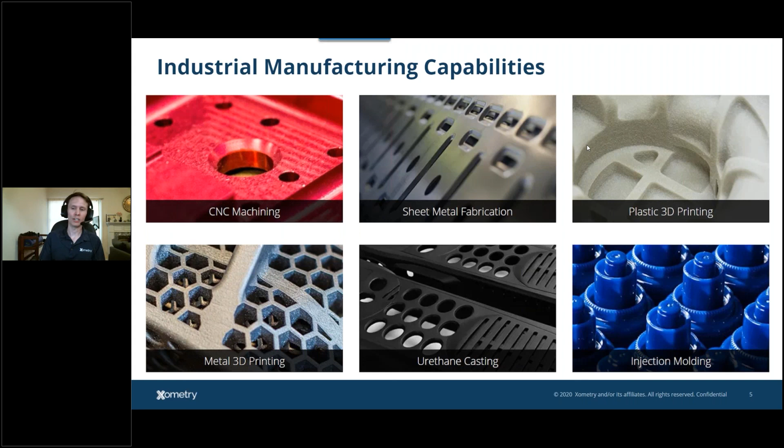And then of course injection molding. So this is something that can truly scale, whether you're looking for the low hundreds or the tens of thousands or the hundreds of thousands. Injection molding is one of the best ways to make parts in high production at low cost per part. So that's what we're going to be talking about today.

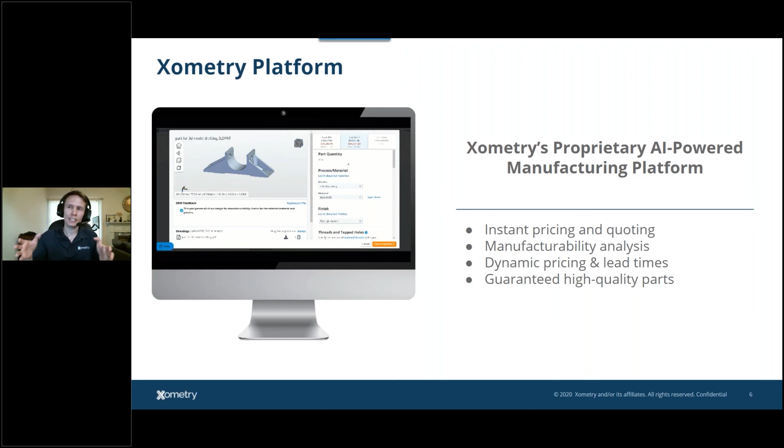Xometry's platform is really unique because it does allow you to upload technical data and kind of spin the CAD and start configuring your part directly online. It's one of the most simplified ways to communicate your technical needs. And for some processes, it's a quote and done, quote and buy experience. And for other things like molding, it may be the beginning of the conversation, but you're creating that template to help guide us in where you want to be with your parts.

I'm going to just go drive the site real quick here, show you a little bit about Xometry's website and our platform, because I know also you may be in different stages of your product development process, or you may be working with a technology that's new to you, like molding. Not all of us have done injection molding projects, so sometimes it may be worth looking at our design guides or resources. So this is Xometry.com's website here. You can see that we have a variety of manufacturing processes that you could go and either start a quote immediately or learn more about.

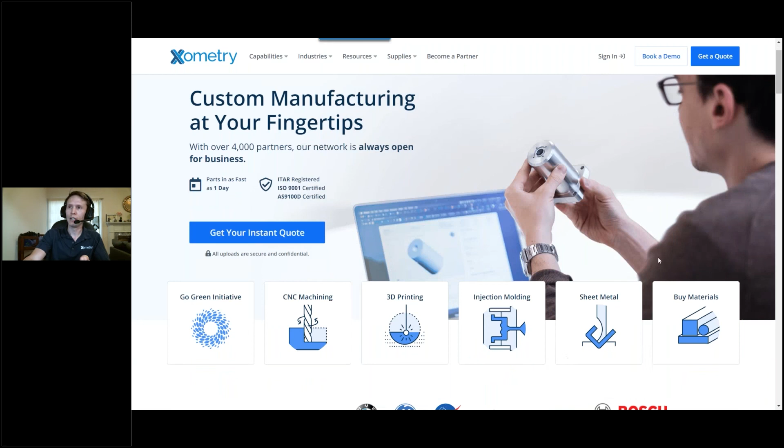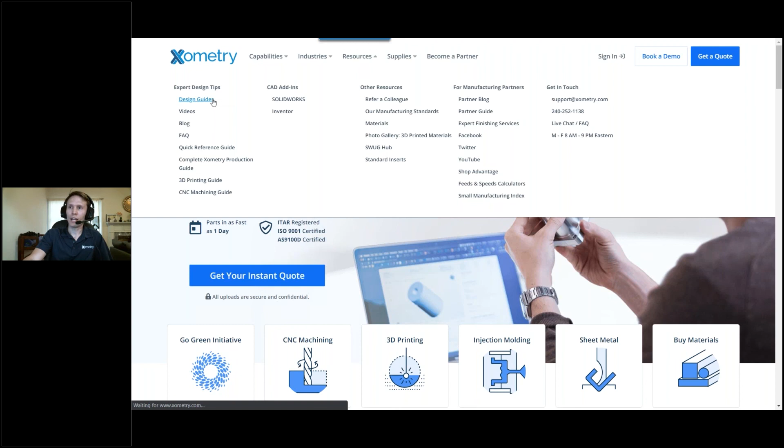I also recommend, if you're in that design phase or you're looking to build a product using a different technology, check out our resources tab at the very top here. And under resources, you could get some really great expert design tips. I really like going to the design guides page. And for every process that we offer, we have a design guide available for that. So obviously today is about molding. So if you want to learn about molding, check out our injection molding design guide. Very useful guide. It's going to go over a lot of the topics that we are talking about today in a little bit deeper detail.

And actually, let me go and bring us to the quoting. I'm going to click get a quote here to show you a little bit about how you would get a quote. So when you click get a quote, it'll take you to Xometry's dashboard. For molding and most of our quoting efforts, you're going to actually start right here. So we can take most native files from your direct CAD platform. So if you have a SolidWorks part or IPT, we can take those directly. We can also take STEP files. They're kind of like the PDF of the CAD world, and SAT files, PRTs, anything that has that solid data.

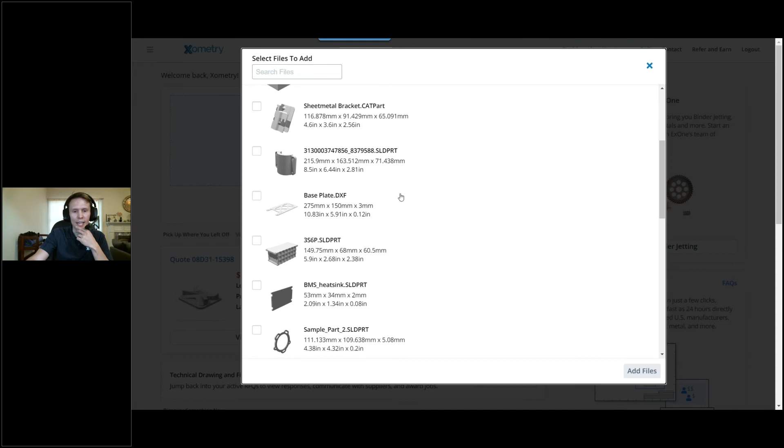Just to note, for 3D printing, we can take mesh files like STL files, but we cannot use STL files for things like machining or molding because you have to make tool paths around it, and those mesh files just don't have enough data to really appropriately cut the metal or cut the tools for those parts. I'm going to go ahead here and show you a little bit about the quoting engine. We'll do this live very quickly. Let me grab a piece that I can mold. Let's grab this piece. I'm actually just going to skip this through to go straight to the instant quote platform.

The reason why I'm showing you this is because, as you're developing parts, as you're moving to molding, one of the first things you may be doing is going through prototype stages. So you may be using different types of processes like 3D printing to make your parts, and it couldn't be easier. So in fact, I'm already quoted. I'm already ready to buy. The second that your part is uploaded, it gets interpreted, and it will actually price out in the cheapest process if you haven't selected a process. So in this case, this part here is only 13 bucks if you're making it using a process like HP Multi Jet Fusion. So 3D printing that out of a nylon material.

I can click on this even further and start to specify my quote. So if I'm going beyond prototyping, I think this is a GoToWebinar little glitch here, but if I'm going beyond prototyping, I can also go and change my process here. Let me try to move this through.

Anyways, I do have a 3D viewer right there, it's just not seen on the preview screen. So I can move through my different 3D printing processes. I have everything from Carbon DLS to FDM. Multi Jet Fusion makes parts in nylon materials. We also have SLS, which is a great go-to for parts out of nylon, and SLA if you're looking for a very nice detail material.

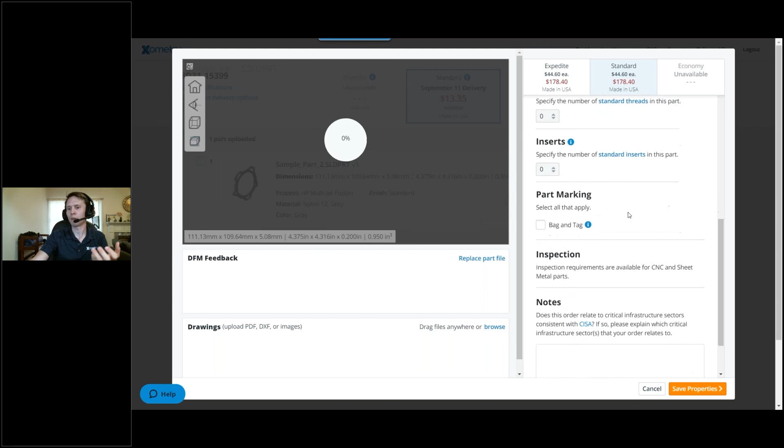So I could go make this in Somos Evolve. You can see your pricing updates automatically online. If I go and change my quantities as well, the pricing will update automatically. And I can further specify my parts, so I can add things like threads, tapped holes, and part markings to this part.

If you're looking to move to injection molding, it's always good to have that conversation early with us. So even when you're prototyping, it's definitely worth starting the conversation about molding. We know that your part's going to iterate. If you choose injection molding, you can start by choosing a material. So I have HDPE here. You have a variety of color options, and if you don't see the color you want, you can always choose other and type in what you need.

Fillers like glass fill are very common for us. Additives like a UV stabilizer, you could add those. And we're really interested in some of these options, like are you looking for a prototype or production tool? How many units are you looking to make? That's going to help start that conversation. Like I said, this is the beginning when we talk about molding, because once you have all the information in, you request a manual quote, and you'll probably actually get a call from Kyra in a second here on that.

So I wanted to show you this very quickly. We'll go into more details later, but I want to talk about the top 10 considerations for molding now. I just want to show you that on an all-in-one interface, we have so many technologies available for quoting and interpreting your part. And again, some of that's automated with instant quote, but we also have the engineering backing to talk through and get deeper into the conversation about your manufacturing project here. But all in one platform.

And by the way, the fulfillment end of this is capable manufacturers. At Xometry, we're actually networked with over 3,000 manufacturers domestically and about 4,500 total globally. So we do have a wide variety of shops, whether those are shops that could do low volume production all the way up to high volume, high spec work. We're able to match these through. So let's talk about that a little bit more. Let's talk injection molding.

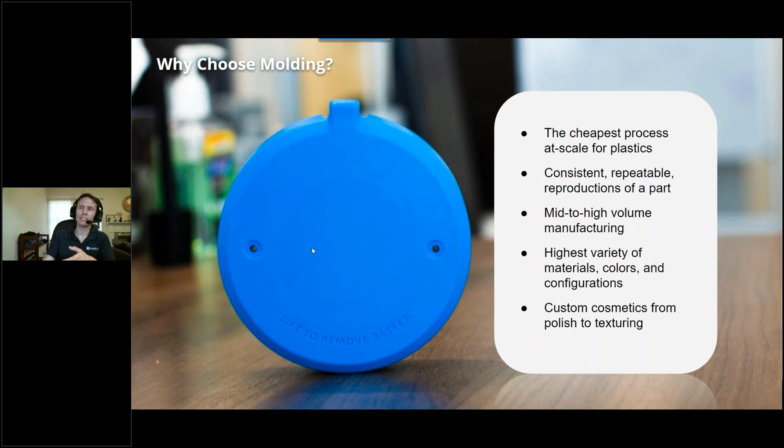It can be used for low volume production, but it definitely excels at mid to high volume needs. And you have a huge variety of materials, colors available, as well as custom cosmetics, because it's just such a tried and true technology for production of parts.

For these top 10 tips that we're about to go through, you just want to keep in mind why these tips are available. When we are talking about injection molding, we are making a tool. This is a metal assembly that essentially has a cavity in the shape of your part. And we're going to be injecting molten plastic into that. It's going to cool, and it's going to have to release from that cavity and continue to make parts.

So when we talk about injection molding, it's not just a direct to part process. It is all about how we specify and make that tool to make your part to your specifications in a repeatable and consistent fashion. So there's a lot of considerations, and that's what we're talking about today. Just understand everything about this is about how can I flow plastic into this cavity and get this part ejected out of the tool right, over and over and over again.

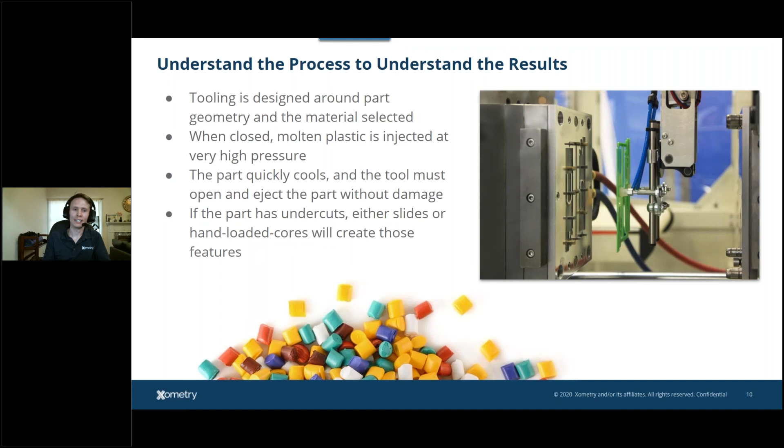So this is where I'm going to send the mic over to Kyra and Kyle to start going through some of the top 10 considerations when scaling up. And Kyra, I think you're up to bat, right? So we're going to be talking about some of these critical strategies to optimize for part design first. So let's go with number one.

Awesome. Okay, let me make sure.

Okay, I'm good. So there are a lot of factors that go into injection molding, like Greg said. It seems really simple when you're thinking about the process, just injecting plastic into a cavity and ejecting the part, right? There are several factors that go into that and making a good quality part. So first and foremost, uniform wall thickness is critical. With injection molding, a molten plastic tends to shrink at different rates. So if there are different thicknesses, you're going to see that reflected on the part.

On the other hand, you can get a void in a really thick area too. And that can be very detrimental to the part. So like Serena said in the beginning, I actually came from automotive, and the process there is you run a plastic bumper and then you put it in a paint oven, it gets painted and it's cured. If a void is exposed to heat, because it's gas in there, it can expand and protrude from the part, which obviously isn't a good quality part either. So to improve that design, you would want to core out that feature.

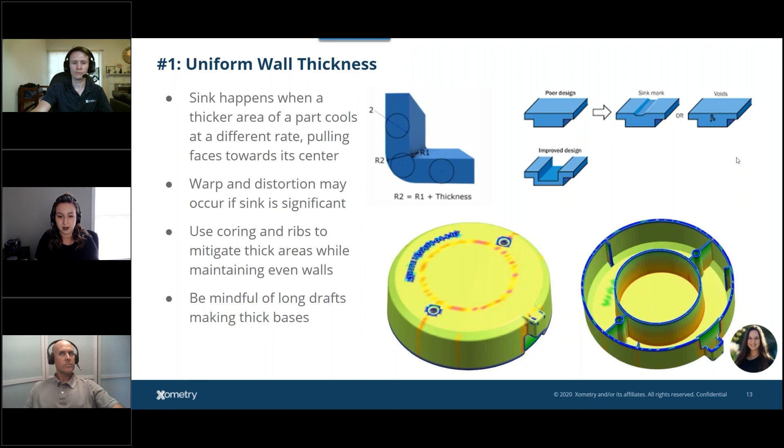Also, keeping this in mind early on whenever you're doing prototyping is critical, because if you design yourself into a corner, and you really like your design, but it's not suited for injection molding, and that's your long-term process, then we kind of have to step back and start from square one. So keeping this in mind early on is critical in your designing journey. So that is uniform wall thickness.

Second is undercuts. Undercuts are pretty complex features that typically require some sort of special tooling called a side action in the tool. Now, with our partner network, something that differentiates us from a lot of others out there is we can utilize our capabilities to find somebody in our network that can handle these types of features. So these are really simple for us to achieve.

Now, what that means is whenever an undercut is there or you need a side action, typically there's a feature that is parallel to the parting line, meaning it's perpendicular to the direction of draw. So you can see in the first and second image there are red areas. That is an undercut analysis done in SolidWorks where everything that is not in the direction of draw is considered red, or an undercut. So that is okay to have designed in the part, but just understand that there will need to be a side action or some sort of feature to achieve that feature.

Yeah, and so I think it's important also when you're talking about undercuts. I mean, if you do have side holes, it's very nice to have side holes on that one face if they're all in the same direction.

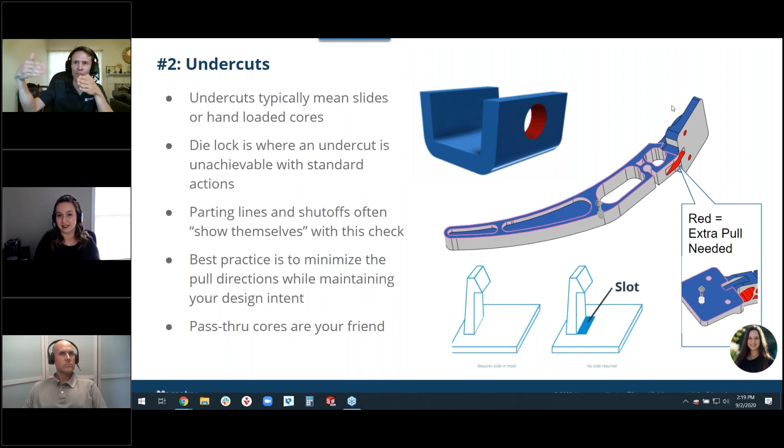And that's going to go into the next slide here, but that allows us to tackle those at the same time with one extra action versus having multiple actions or hand loads.

And then before you switch over to that slide real quick, the bottom image there is considered a pass-through core. So if you're doing a typical snap feature like that, the first image is doable, however, it is more complicated. So an easy way to get around that is having a pass-through core where there's actually a hole underneath that feature, so you can just come up from the bottom and capture that surface there with the other half of the mold. So that makes it really easy.

There are ways to get around it, but again, it's not impossible, but it does make the tool a little bit more complex. Yeah, and that complexity can add cost. So, you know, a lot of times, like when you're mitigating a side action by using a pass-through core, you may be reducing the cost of your tool by potentially thousands of dollars, depending on the complexity you're removing there.

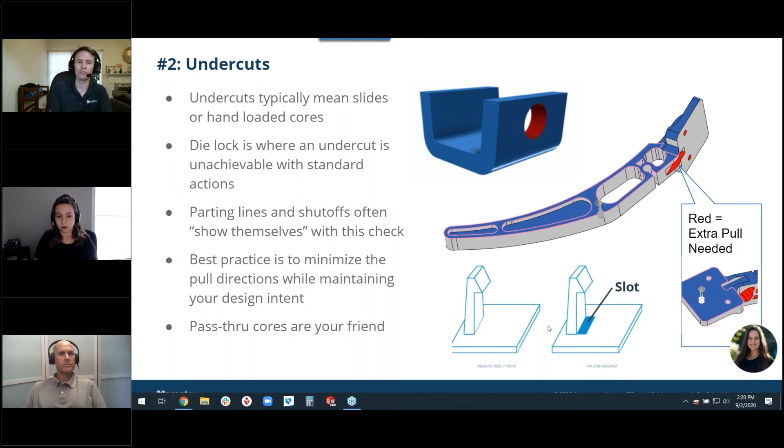All right. Okay, and 3, draft. So we have thickness, undercuts, and drafts. Those are the 3 kind of main features that you want to look for in a good injection molded part. So draft, the simple purpose of draft is to provide ease for ejection of the tool.

So I kind of use a silly analogy. If you imagine a Chinese finger trap where you have that little game and you can't get your fingers out unless you squeeze the center and allow air to come in there, that kind of applies here in molding as well. So if you have vertical walls on a part and you're trying to really pull it off the mold and it's creating a vacuum on the inside, it's going to be really, really hard to do that. So we apply this slight angle to the walls to allow air to get in there and pop it off the tool.

Typically here at Xometry, our minimum draft requirement is a 1/2 degree, but we've circled 1 degree there just because a little bit more is better, but we can get below that if we have to. And then of course that can adjust with surface finish as well, which Kyle's going to touch on later. The rougher the surface, the more draft that will be needed. So if you don't have that, you could definitely result in drag marks or scratches on the surface of the part, from kind of scraping it off the tool.

Yeah, I've seen some of that sometimes in like speaker grates and things. Like if it's just through pins, you may see little scratch marks because it'll pull on each one of those pieces.

And when we talk about this uniformity, undercuts, and drafts, which by the way is Kyra's conversation every single time we're talking molding here. But what's beautiful about this is most basic CAD programs have these tools available right away. That's usually not an extra cost. So I happen to have SolidWorks on my computer, but I know you could do this in Inventor as well.

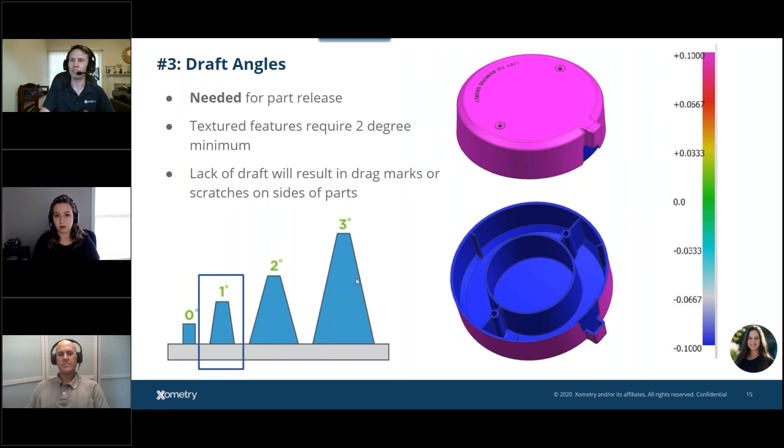Yeah. So now we're gonna move the mic to Kyle, because we have this uniformity, undercut, draft, which is something that as you're designing, it should just always be in the back of your mind. But then there's a conversation that you usually have with your mold team, like the team at Xometry here, which is what we call the PEG report, right? Parting, ejection and gating. So tell us a little bit more about that.

Yeah, so the PEG report is actually something that we do at the beginning of every project. We look at the parting line, the ejection, and the gating strategy, which is what we'll cover here in the next few slides. So the parting line and shutoff, this is actually where the tool halves come together. So the core and the cavity meet, and there's sometimes a little visible line that's represented on that parting line. To Greg's point there earlier, he had the part in his hand. You sometimes can't see it because it's usually buried on the bottom side of that part.

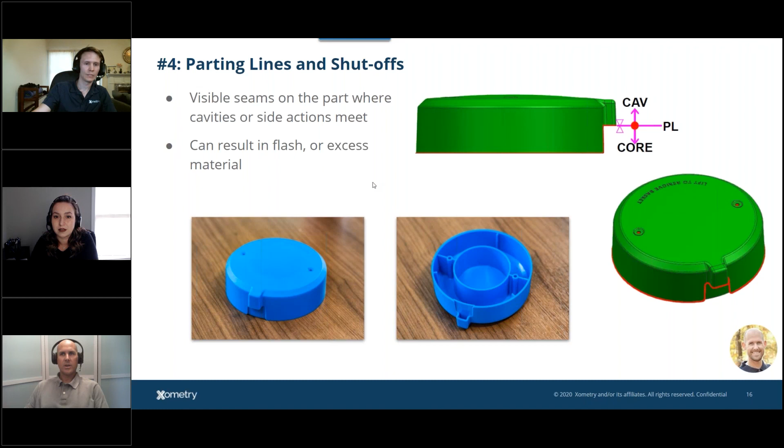But as you see the side there, if you look at the image on the bottom right, that red line is the representative parting line, and it jogs up in order to capture that little ledge on the part. You can sometimes see that parting line there, but we try to hide that and blend that as much as possible so you can't see it. At the same time, at these parting lines, you can sometimes have little excess bits of material, otherwise known as flash, where the material kind of seeps into that parting line. But again, parting line is something that's done in everything, core and cavity.

So the E in the PEG is the ejection strategy. Whether it's ejection pins, it can be done through hand loads, through automation. There's a couple different ways you can actually remove the part from the tool. But the purpose and the function of the ejector pins, they actually push the part out of the mold. So this is the only way to get the part out. To Kyra's point about the draft, the more draft you have, the easier it is to push that part out of the tool. The less draft you have, sometimes the more pins you have to get that part out, and more pressure to do that.

Typically, there are little circular features, as you see there in the image to the right, little orange circles. Those would be all of the ejector pins on this particular part. We're not limited to circular features. We're not limited to just pins. We can also do blade ejection, which would usually be done on ribs, or in this case, there's also ejection done on the bosses, which is kind of hard to see in the picture, but it's the little light green areas on those bosses. So again, we're going to try to put as much ejection onto that part to help get it out of the tool as quickly as possible. And this is also done on the non-cosmetic core side of the tool.

Yeah, and something about ejection is these pins are not just to remove the part, but to remove it evenly. So you want to have even pressure across the part, because seconds ago in this cavity, it was liquid. It was liquid plastic, and it's still cooling. So if you had uneven pressure on the part as it's removing, you could actually poke a ridge into the part as it's ejecting.

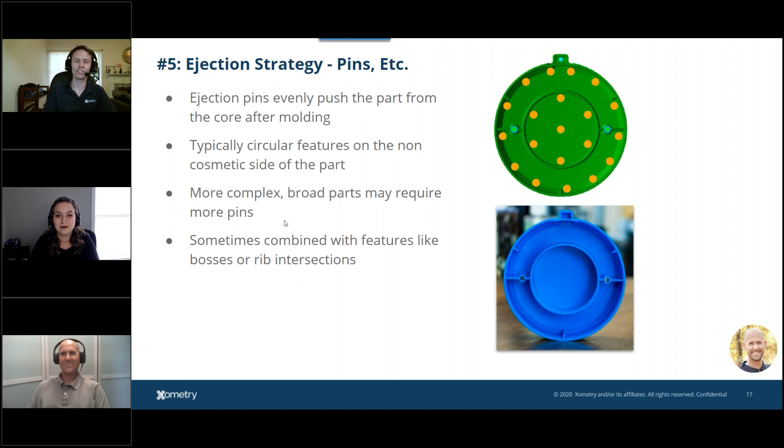And it's important with all of these, with the parting line, the ejection, and the gating, to communicate, because if you go back to the parting line, there may be a cosmetic side where if we have that parting line jog, you don't want to see that there. Same thing with that ejection. If we're trying to eject off of something that's a sealing surface, we don't want to put a pin there, because to Greg's point, it may leave a dimple there, and if it's sealing, then you lose that sealing ability.

Same thing with the gating strategy. The gate is where the plastic that is in molten state is actually injected into that cavity side of the tool to fill the tool. Usually one of the most common gates used in our industry, with low volume or even non-low volume, is an edge gate. It's a small gate, a small basic blemish on the outside cosmetic side of the part.

In this situation here, because of the geometry of the part and customer requirements, we actually were able to gate onto the inside of the part. So this is actually done with a sub gate into just a little small post that helps fill the part from the inside. So normally it is on that cosmetic side, but because of certain geometries, maybe cavitation or material, we're limited, but we also have some other abilities. In this case here, we can actually hide any sort of gate blemish.

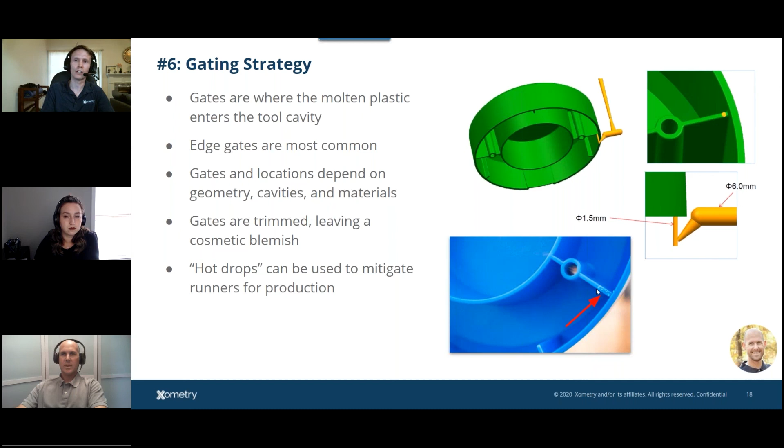So something like this, where you see a small blemish, there's probably a leftover runner on the part that is removed before it ships to the customer, and that's usually done with die clippers or some other trimming feature. Yep, there's typically some small little vestige left over. We try to mitigate that as much as possible, but it also depends on the material choice, which we'll go into in a second. But everything combined, your geometry, your material, and the production method, all that helps us determine the best approach for your project.

Speaking of that, we have requirements, right? Some of it is not just the CAD geometry. It's not just how the part's designed, but what other needs do you need to communicate to get a successful project? So the last 4 of these 10 are the 4 requirements that must be communicated with your molding team.

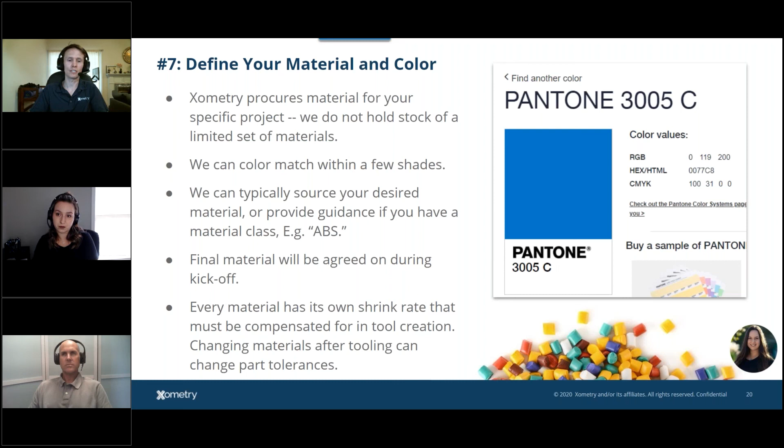If you are looking for alternate materials, or you have an exotic material in mind, we do high temp materials. We mold things like PEEK, we mold things like PVC. So we have a lot of options because we source for your project needs, for what's going to make your project most successful. Absolutely.

All right. And on tolerances, so when does the tolerance conversation come up in this? How early do we talk tolerances? Honestly, everything that we've covered, I like to talk on as early as possible. And that's just simply because sometimes the DFM stuff comes up later on, right? After we already talk about pricing.

But tolerances, we do want to recognize this early on before we quote, just because it's not going to add to the initial investment of the tool, but this could be a factor that contributes to some pricing down the road. And what I mean by that is if there is a tolerance that's tighter than our standard, and I'll cover that in a second, oftentimes it requires further tool grooming to really get it to the proper state and that tolerance. So depending on the tool work that goes into that, that could be an additional cost later on.

So to back up a little bit, our standard tolerances, we hold the molder to cutting the tool at plus or minus 5 thousandths, so the machining aspect. And then of course we allow for 2 thousandths of variation in the plastic. So all in all, that's 7 thousandths total. Which is an improvement from where we've been. Our standard tolerance used to be plus or minus 10 thousandths. So we've brought it in because we've understood our capabilities. We've understood that we can hold, and oftentimes do hold, way tighter than that anyway.

And on top of that, our part-to-part variation is very low. Once you cut the tool and you don't adjust the process anymore, it's pretty repeatable. That's just the nature of injection molding. So getting back into the tighter tolerances, if there is something that's tighter than our standard, we will do our best effort at the time of the T1 samples, or the first 10 good parts off the tool. And then any further tool grooming will be an additional expense later on, and that could be calculated at that time, just because we don't know the initial work that's going to go into it based on how close we get it the first time, which oftentimes we're pretty close.

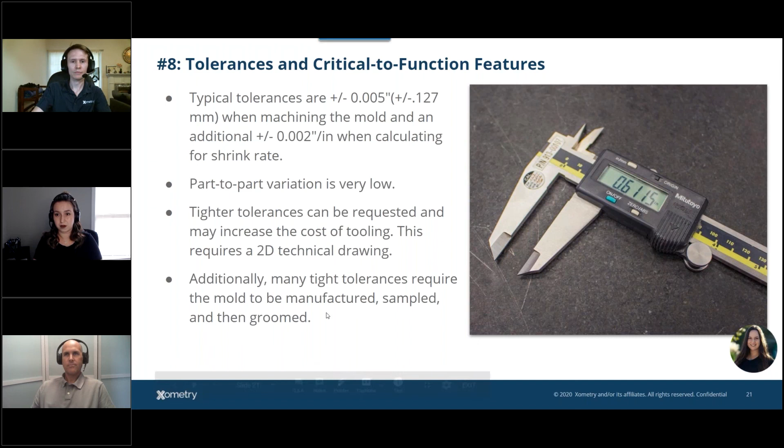So, we're talking about these T1 samples, and a lot of times people ask, okay, I have my part, I have my color, why is my sample shiny when I want it matte? So let's talk part finishes and textures, and what that looks like when I'm scaling up to a part where I need a nice matte texture on the top.

So a lot of what Xometry does is custom, and finishes and textures are to that same extent. We're not locked into two to four specific finishes. We can custom blend, custom match, and have specific areas that are polished and other ones that are textured.

So first of all, a texture or a finish is what the part's going to look like. It's a shine, it's a texture, maybe it's non-cosmetic and you don't care what it looks like. But it is basically the cosmetic finish on the part that is applied to the tool. So whatever texture's on that tool then transfers to the part.

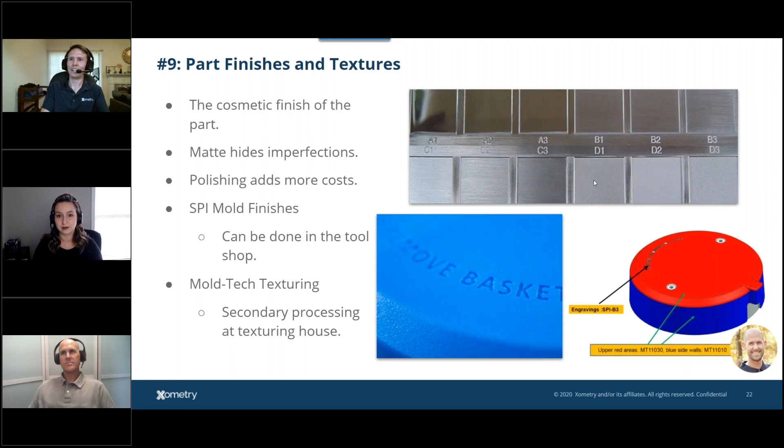So all this conversation, we have uniformity, undercuts, draft, parting, ejection, gating, stuff that's going to happen to your part. Then we talk about tolerances, materials, colors, texture, and this is where it all comes together. When we kick off the project, all this comes into play, and number 10 here, the project and tooling approach. So Kyle, what is the mindset? You have this information, what else do you have to ask?

It's funny, because I think this is probably one of the most overlooked things with programs. You get into the part details, you get into the part geometry, and you lose focus, you lose sight of some of the things that you need to know for long-term success.

Again, tool life. Tool life is probably one of the biggest things where, if our standard quote has a tool life that someone selected at 2,500, but you need 5,000 parts a year, obviously that's not going to work. So having clear communication of how many years you need this tool to run or this part produced is so important, so that we can properly build and quote a tool that'll meet your need. Again, annual usage, because if the communication is great on the front end, we can be ready for when you do need parts.

If you have a quarterly requirement for production, I need 5,000 parts a quarter, we can start planning and work with you to meet that requirement. The mold specification, the origin: we do manufacturing both in the US and overseas in Asia. So we have to account for shipping if we go to Asia. If it's US, maybe there are certain requirements for ITAR or something like that we need to meet. So that upfront communication, again, is key.

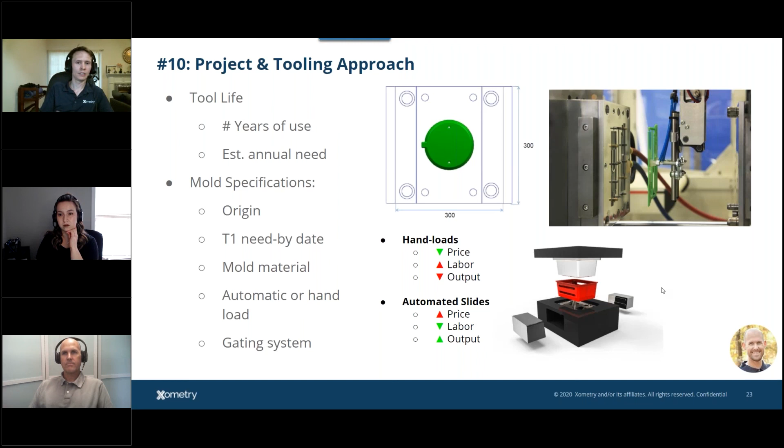The biggest thing for this is, we're versed in a lot of different approaches to making your project successful. We're not confined into a small box of saying this is what we can do. Kyra is here to listen and consult, and Kyle is here to kick my butt when I overpromise something. He has amazing technical aspect, and he'll reality check on what is needed and when. But we really do have this have-it-your-way approach, and I know this is Kyra's go, so I'll let you go on this. This is the molding with Xometry approach that we have.

Oh, you're muted. Thank you. I just noticed that. Right. So with Xometry, we want to have the have-it-your-way approach. And just to back up here, everybody knows we're working from home. I try to mute myself as much as possible so my dogs aren't crazy in the background.

So I apologize. But molding with Xometry, we do offer the have-it-your-way approach. What that means is we want the design as close to your original thought and your original intent as possible. So if you've been prototyping a lot, you've nailed out a design, everything looks good, but you need to make a few changes for manufacturability, that's where we want to be.

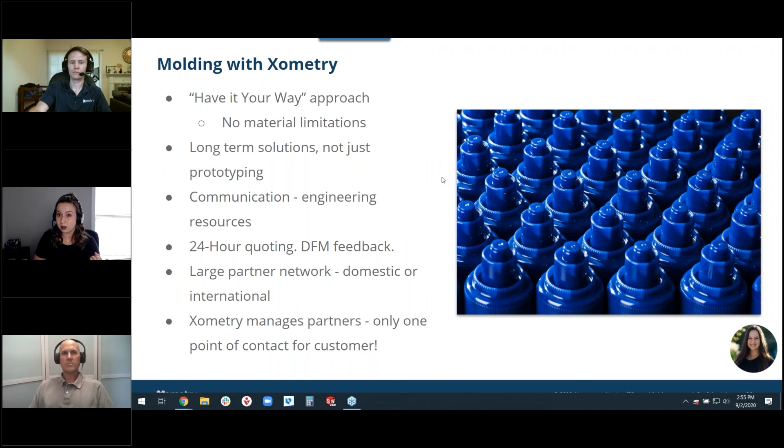Meaning that truthfully, if you were to order a project with us here in the US and another one overseas in Asia, you wouldn't know the difference between the two because we should deliver the same quality and the same communication. So we are your single point of contact. We absorb all those time differences and everything. Like I said, it sounds too good to be true, but because we have this diversity, we're here to communicate and just make sure that your project's been successful.

So really get in early on with your project with us, because we're always a great resource, and we want to make sure that pragmatically you're taking the right steps to get you towards that goal. Definitely recommend checking our design guide again under Xometry's resources page.

And I know I'm going to get to Q&A right now because I just saw several more roll in here. But we have FAQ and live engineering support. If you quote, by the way, you're going to find your sales contact really quickly because they're going to email you almost immediately. And we have several ways to talk to us, including live chat directly on Xometry's site.